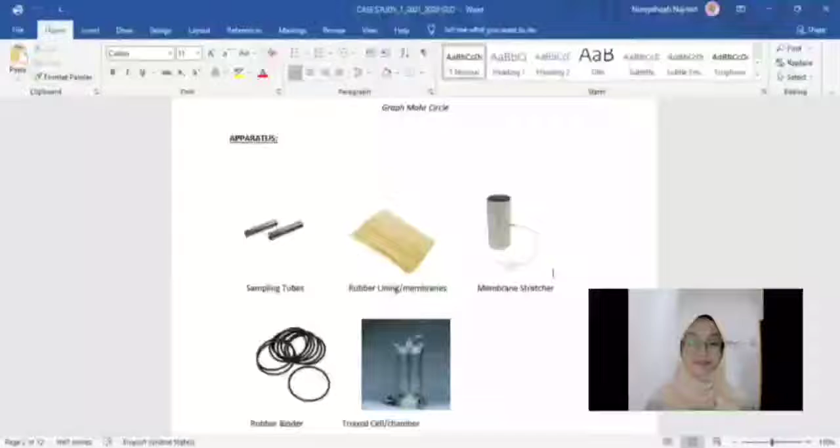So now I'm going to introduce the apparatus or the materials that we use in the triaxial test. First, we need a sampling tube. A sampling tube is used to hold small quantities of substances undergoing experimentation or testing. These tubes are usually made of glass and vary in size and purpose. A sampling tube must not be confused with glass tubing, which can be used to carry fluid between laboratory equipment.

Second, we need a rubber lining. A rubber lining is a tough elastic polymeric material used to coat exterior surfaces or the interior of containers, for example tanks, pipes, and other vessels that house fluids, to prevent corrosion. Rubber linings are used to prevent corrosion, substance contamination, ignition, and explosion.

Third, we need a membrane stretcher. The membrane stretcher is used for easy placement of latex membranes over soil specimens in triaxial cells or flexible wall permeameter test cells. The 1.4 inch stretcher is a specifically sized aluminum tube equipped with a barb fitting and vinyl tube for connection to the user's vacuum source.

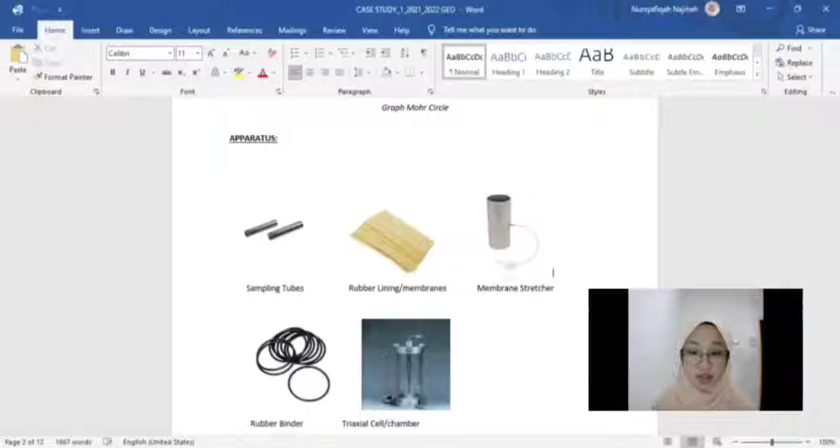Fourth, we need a rubber binder. And the last one, we do need a triaxial cell. The triaxial test is performed on a cylindrical core soil or rock sample to determine its shear strength. The triaxial test attempts to replicate the in situ stresses (stresses in the original place the soil sample was taken) on the core soil or rock sample.

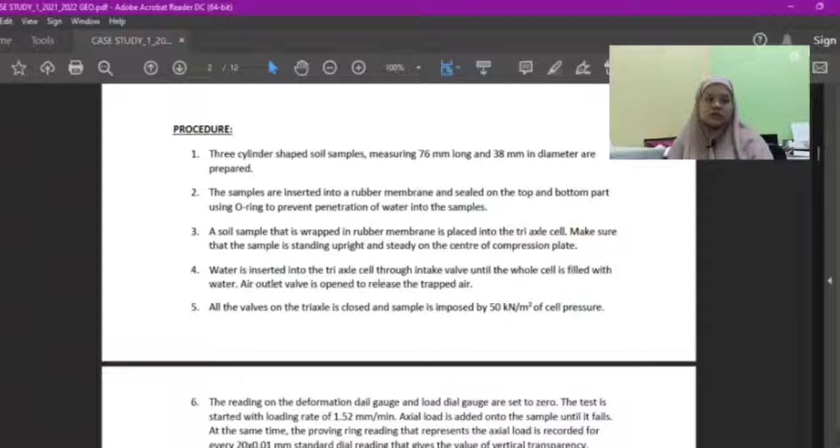Number 5, all the valves on the triaxial cell are closed and the sample is imposed with 50 kN per meter square of cell pressure. Number 6, the readings on the deformation dial gauge and load dial gauge are set to 0. The test is started with a loading rate of 1.52 mm per minute. Axial load is added onto the sample until it fails.

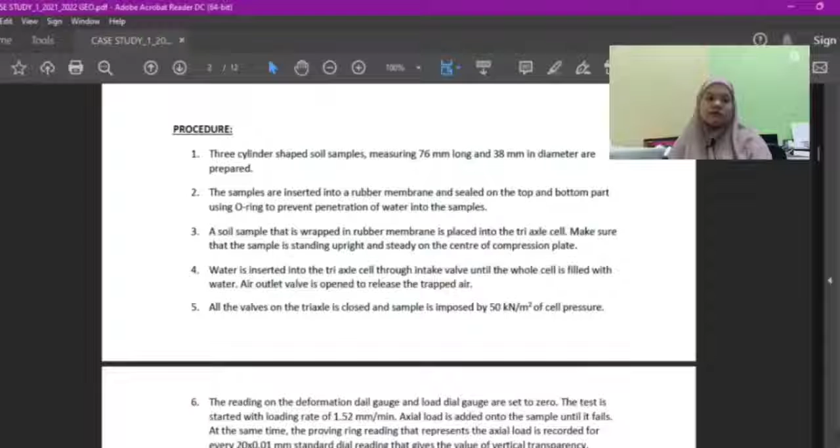At the same time, the proving ring reading that represents the axial load is recorded for every 20 times 0.01 mm of the standard dial reading that gives the value of vertical displacement.

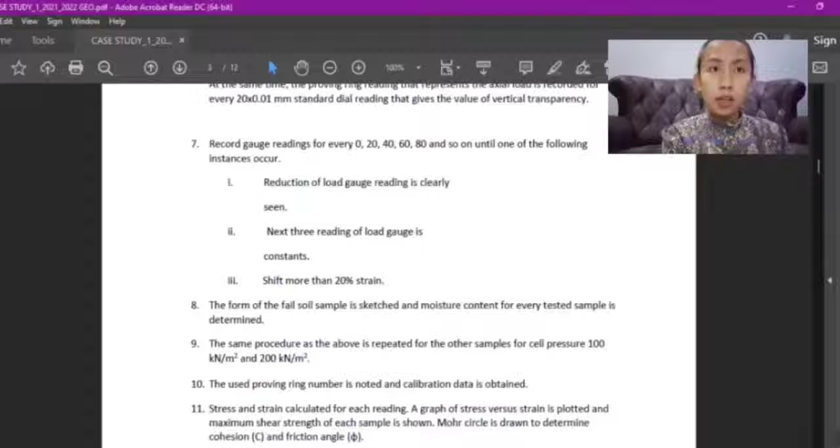Today, I will continue the presentation of the procedure and the advantages of this test. Number 7, record gauge readings for every 0, 20, 40, 60, 80, and so on until one of the following instances occurs. Number 1, reduction of the load gauge reading is clearly seen. Number 2, the next three readings of the load gauge are constant. Number 3, more than 20% strain.

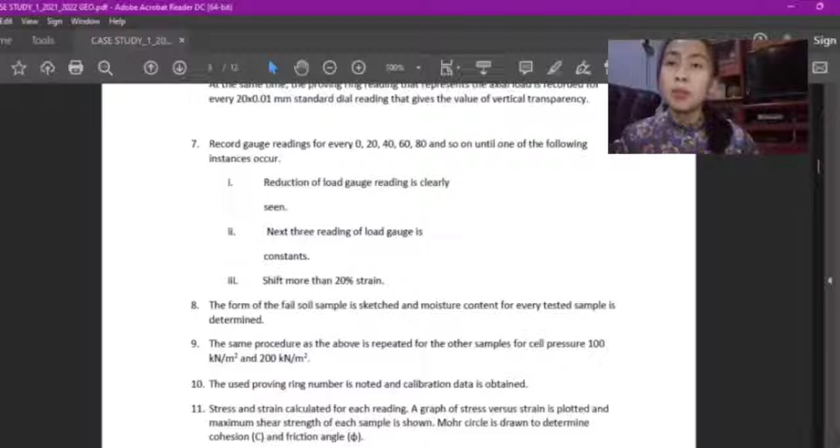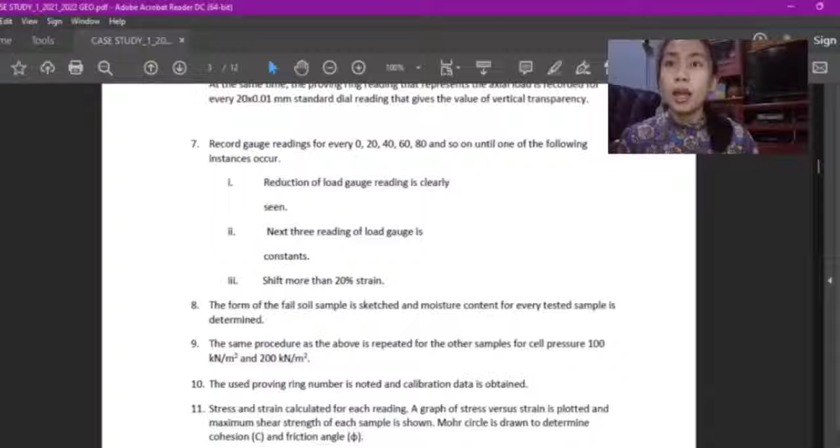The next step is the form of the failed soil sample is sketched and the moisture content for every tested sample is determined. The next step is the same procedure as above is repeated for the other samples, for cell pressure 100 kN per meter squared and 200 kN per meter squared. Step 10 is the proving ring number used is noted and calibration data is obtained.

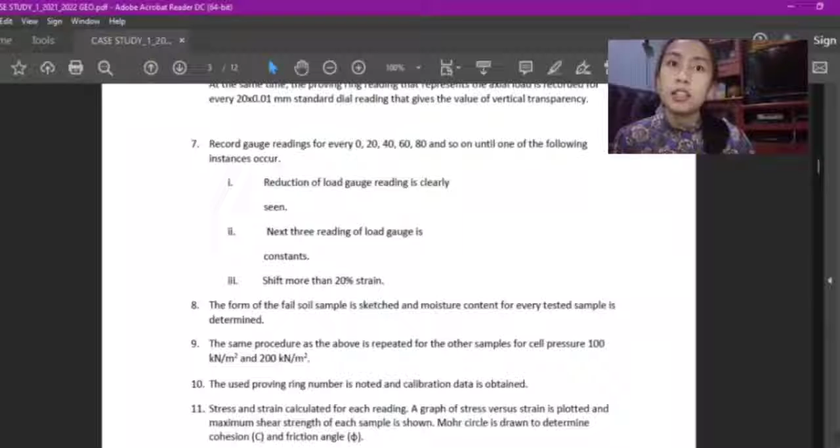And the last step is stress and strain are calculated for each reading. A graph of stress versus strain is plotted and the maximum shear strength of each sample is shown. Mohr's circle is drawn to determine cohesion and friction angle.

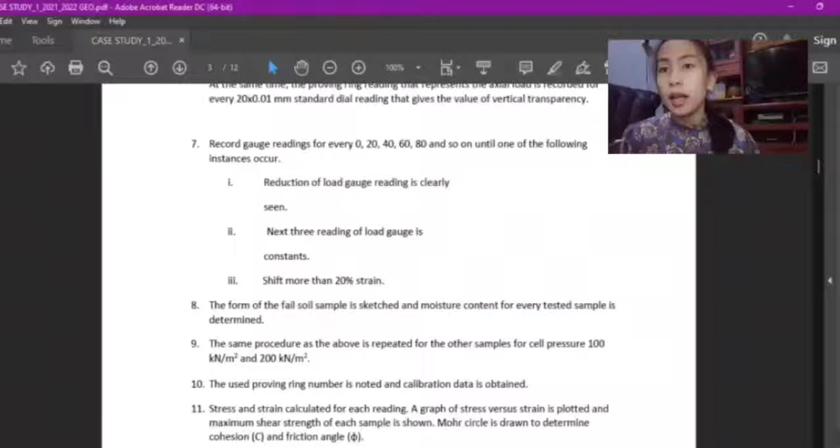Okay, for the discussion, state and sketch the types of failure for the soil sample: the first is a vertical slip surface. The second is a 45-degree slip surface. And the last one is no slip surface, bulging out.

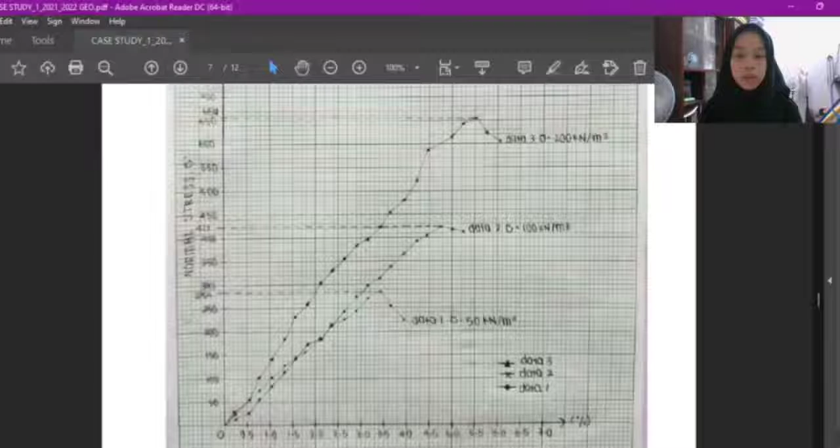Now, I would like to present about Mohr circles, but first I will give the definition of Mohr circles. Mohr circles is a two-dimensional graphical representation of the transformation law for the Cauchy stress tensor. Mohr circle is often used in calculation relating to mechanical engineering for material strength, geotechnical engineering for strength of soils, and structural engineering for strength of built structures.

It is also used for calculating stresses in many planes by reducing them to vertical and horizontal components. These are called principal planes in which principal stresses are calculated. Mohr circles can also be used to find the principal planes and the principal stresses in a graphical representation, and is one of the easiest ways to do so.

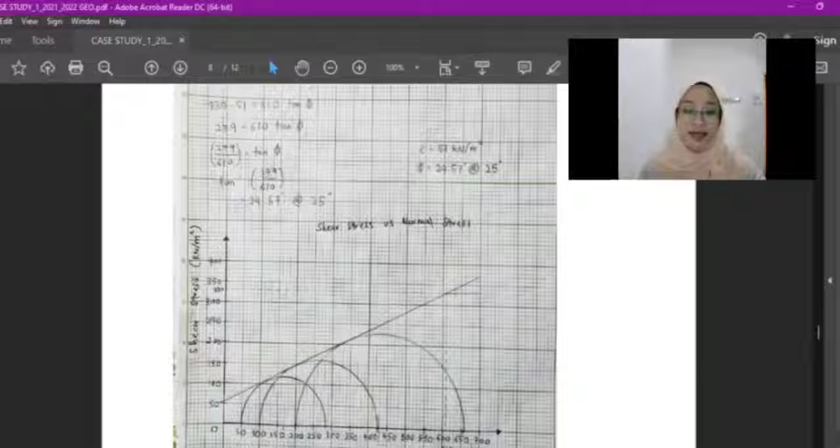Thank you. Next, I am going to talk about the advantages of this test, the triaxial test. The unconsolidated undrained triaxial test is the fastest test, typically complete under 30 minutes. The pressure in the cell is maintained at a constant value. The deviator stress is applied and increased rapidly until failure of the specimen occurs. It is performed on cohesive soil samples to determine the undrained shear strength of the soil sample.

It has no saturation or consolidation stage and is a short-term test to determine short-term engineering problems. It only has a shear stage. The first advantage of this test is the stress distribution on the failure plane is uniform. The second one is the specimen is free to fail on the weakest plane. The third one is there is complete control of the drainage. The fourth one is pore pressure changes and volumetric changes can be measured directly.

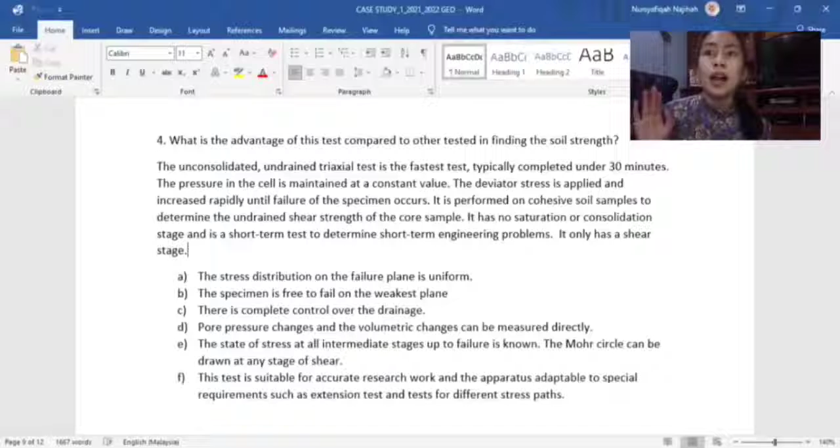Next is the state of stress at all intermediate stages up to failure is known. The Mohr circle can be drawn at any stage of shear. The last one is the test is suitable for accurate research work and the apparatus is adaptable to special requirements such as extension tests and tests for different stress paths.